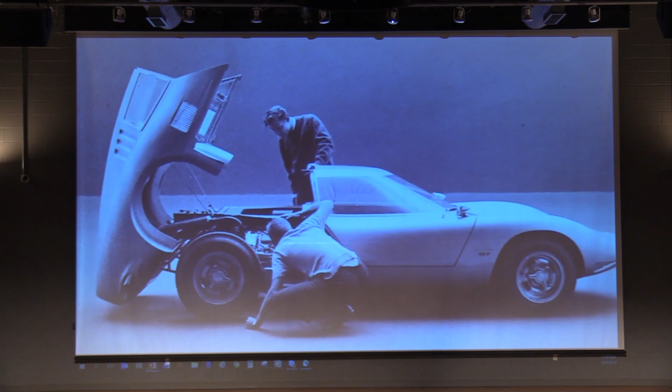I feel no matter how good the car looks, pretty as pretty does, she's got to go like she looks. I wouldn't have a car that didn't have the fastest engines and everything. I've got engines in here now I shouldn't talk to you about, because you're not supposed to be doing this.

The best in every individual. So to bring out the best in people, you have to have them involved. Well, people like to be involved in things that are exciting, and of course the whole idea of racing is exciting in itself, to be out here and enjoy the thrill of racing.

We're so close to bringing this dream of an all-new mid-engine Corvette to reality.

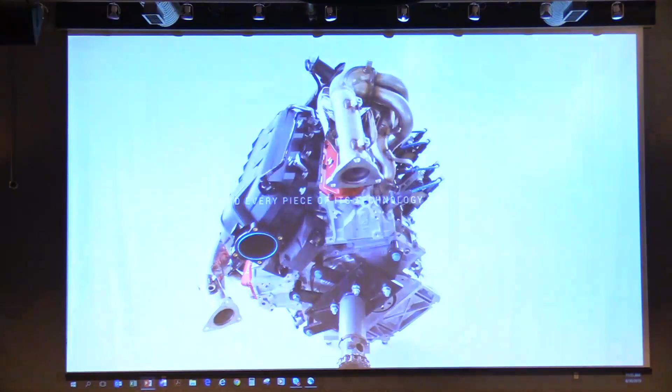World-class lubrication system. More tactile feedback, so more direct steering. The rear weight bias for better acceleration, performance, and track times. A dual-clutch transmission, quicker than a human being could shift a manual transmission. The history, people, mystique of the car, we're simply taking the baton across the finish line. And this is really highlighting that craft and quality. This is going to be the car for a new generation. A very compelling three-dimensional machine. A game changer. People will look at it and they just will not believe what they're seeing.

When you get into a Corvette, you're a superhero.

That's you guys. You guys are the superheroes, and thank you so much for being here. We wouldn't be able to do what we do if it wasn't for your support, buying the cars, being part of it, enjoying it, making it part of your lifestyle. So thank you very much.

It's really weird watching ourselves on the big screen here. I don't know about you guys, but it's pretty awkward watching ourselves back. Anyway,

That video was a compilation, it was not scripted. They just sat all of us on the team down and talked to us about the car, and I think it took 8 or 10 hours, so we got 2 minutes of good material. So that's what you saw. And actually we used a lot of that material.

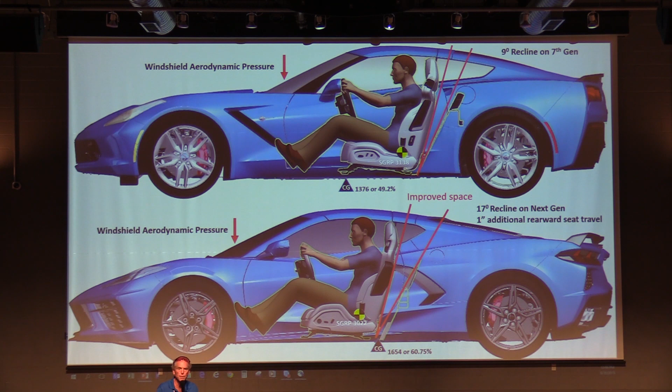When you put the windshield here, you don't need such big aerodynamic aids. So on our Z51 package, which actually has true full vehicle downforce, you see there's just a little tiny splitter on there. That really helps for contacting curbs and things. So that's a way that the architecture itself makes a fundamental change into the way we can do our engineering.

So the other part of it—does anybody here drink beer?

Okay, a couple people. So the luggage—you know, it was funny because when we did the reveal, I wanted to talk about luggage room, and the communications people were like, 'Are you nuts? Why would you talk about luggage room in a reveal of a high-performance sports car?' But we come to these events and we watch what you do with your cars, and we've kind of spoiled you since the 5th generation. Even though people don't say luggage room is a reason for purchase of a performance car like this, it's nice, isn't it, to have that kind of capacity.

And it lets you incorporate the car into your lifestyle. You can go on long trips. You don't have to bring an SUV. You can look good, you can have fun driving, and you can bring everything you want in your car. So we wanted to be able to keep doing that.

We had the issue of—it would have been easy to just do a fixed roof car. We wanted to keep the removable roof panel, even on the coupes, and so we had to have a place to put it. It had to fit in the back. That's why you have a trunk in the back and a trunk in the front. It made our job a lot harder, but that's part of the formula—we had to figure out how to do that.

And actually, if you fill the front and the back with water, it's almost exactly the same volume. The shapes are very different, and that was a compromise we had to make, but if you look at the total volume—if you're packing with soft luggage and so forth—in fact, even the luggage that we sell as an accessory that completely fills the back of a 7th generation car also fits perfectly in this car.

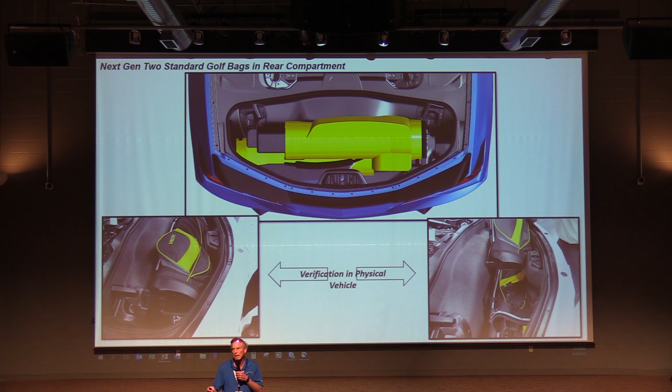So in the back, we want to make sure, and we say 2 sets of golf clubs, that'd be 2 day bags, but we actually did go out and get a pro bag, like a real professional golfer's bag. I don't have the picture in here, but you can put one of the giant Caddyshack type bags here in the back, and of course the front.

The top goes back here, and one of our development engineers likes to ride mountain bikes. He's got a 29er, if you know what that means, 29-inch diameter wheels, the biggest wheels you can get on a bicycle. That fits in the back, and then he puts the bike on the bike rack. So you'll find that this car has a lot of utility, certainly superior to any other mid-engine vehicle. There's the roof in the back.

I mentioned we have both exterior and interior design here, so it's awesome to have both Kirk and Brian. Kirk's going to go through some of the stuff he went through yesterday, talk a little more about exterior design, then we'll get Brian up here to talk interior. All right, good afternoon.

Yesterday we went through the exterior design, showed you a lot of stuff on aerodynamics, things like that, and we really look for the exterior, go back a slide, sorry, really look for the exterior to draw you in.

We're trying to get your attention with the exterior design, but it's really the interior design that we look to seal the deal. We spend a lot of focused attention, a lot of design effort goes into the interior. If I had to score between exterior and interior, as far as the number of releases, the number of components, the interior probably has 3 times the components that the exterior does.

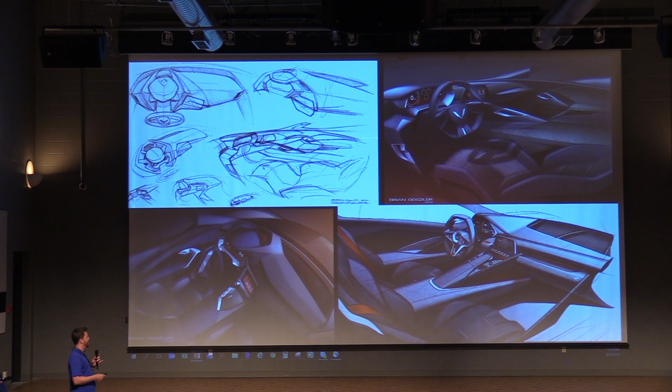So these are some of the early design sketches. We always start in 2D, some combination of digital drawing and pen and paper. We have a team of about 4 or 5 designers sketching different themes. You can see in some of the sketches everybody's excited that this is the first mid-engine Corvette, so we're bringing that into our sketches. We're looking at different ways we can tie in some of the design features from the engine compartment, bringing that through and forward into the interior.

Here you can see some of the first sketches from Tristan Murphy, the lead designer, and the very beginnings of the cockpit shape coming together. You can see how the forms in the engine bay are feeding in through the waterfall and up toward the center. The cockpit shape starts to take form here around the steering wheel and driver's area. This is basically the final theme sketch that Tristan did.

So what you can see here is the adrenaline red accents in the cockpit area, and the screen tilted toward the driver. We wanted to make a very driver-focused environment, but also still have a really nice space for the passenger to enjoy too.

After the sketches, we move forward into clay model, and it's really important for us as part of the design process to be able to see and quickly modify, model, and test out different design solutions. Clay is a really great tool for us to do that. We can change it very fast, and we can work back and forth.

We have a buck in the studio where we actually have physical seats from a C7, and we can cube it up together, push the seats in there, sit in it, see how it feels, and double check our assumptions on things, then pull the seats back and start working on it again. We can do that within half an hour.

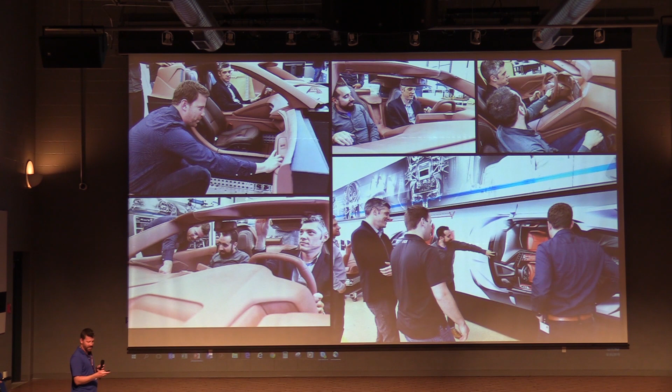After we go through the clay model, another big part of the project is creating hard models, so we actually create a wrap model. This is all foam parts painted in primer right now, and we wrap these parts in leather, and that way we can show senior leadership within the company and kind of sell the vision for what we want Corvette to be.

So here's a couple shots of that foam model. You can see the Stingray in the back there.

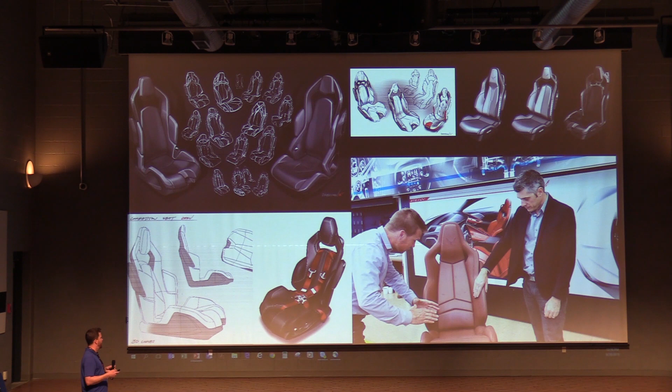Another huge part about the C8 interior is the new seats. We have a 3-seat strategy, Harlan's going to talk a little bit more about that. But Nathan Dressman, who is the seat designer, you can see him here. We wanted to have the base seat, which gets you your value, the GT2 seat, which gives you a lot more luxury, great for grand touring, and then also the competition seat, which builds on today's competition seat with these nice aggressive bolsters to hold you in place during hard cornering.

Another great improvement for the C8 is the steering wheel. We're very inspired by looking at race cars and things that were out in the gaming market, and we're looking at the digital screens. On the C8 we have a 12-inch digital cluster.

One of the things we found when we were sitting in the car with the round wheel is that it was clipping off the top corners of the instrument cluster. So we opened up those clusters and flattened the top. We flattened out the corners of the wheel to allow us better vision to the cluster, and then we also dropped the top, which allows a little bit better down vision that Tad was talking about a couple minutes ago.

And then bringing up the bottom also gives you much better access getting in and out of the car, so you're not banging your knees on the steering wheel.

So here you can see kind of the final production wheel with the Z mode button that Sang did. And then here's some more detailed shots on the car.

One of the things we really wanted to focus on with the interior for the C8 is really getting a huge level of quality and craftsmanship into every detail. So you can see the different layering going on with the cockpits, the various genuine materials building up: real leather, suede, perforated metal, and stitched leather. So everything that you touch when you sit in the C8 is going to be real wrapped goods, real aluminum, real carbon fiber.

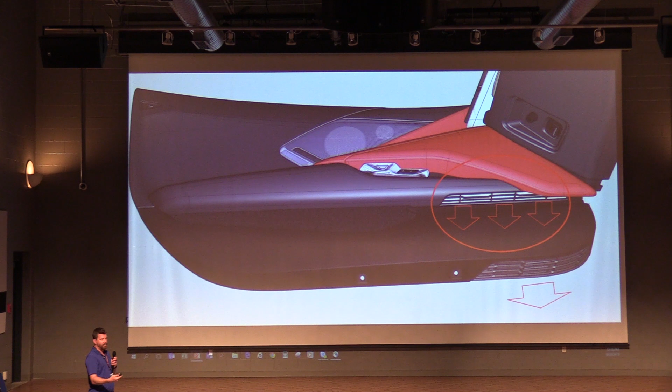Another innovation we had here was that Corvettes have always had a bass speaker in the door, but in the past what we've done is used a plastic speaker grill, which means you have a big piece of plastic beside your knee. We wanted to see how we could improve on that for the C8. So what we were able to do, working with our engineering team and the team at Bose, is port the sound out through the bottom of the door. So we have these vents on the front, and that allows us to get the bass sound that we need, but also have these nice soft wrapped parts right where your leg is. That's a huge improvement.

And then, speaking of the speakers, this is a nice shot of the stainless steel speaker grill that's on the waterfall, and you can see the cross flag logo in there. That's kind of a nice tie back to the way we've done the waterfall in the previous cars. And here's the same shot of the speaker grill in the door.

You can see the real carbon fiber, real aluminum on the console. It's just some nice craftsmanship shots showing the interior.

And here's just kind of this shot that just kind of sold everything for us, looking at the driver cockpit area and how exciting this thing's going to be to drive. We really want that feel of when you sit in this car, you're going to be excited. It's a really exotic environment.

And then here's just the whole team that worked on it. At the end of the day, designing a car, especially like a Corvette, is super fun, but it's all about the people, and these are the people that made it happen.

So just like on the exterior, we work hand in hand with the interior folks. It's such a highly integrated machine, everything has to go together. So all the things you're doing on the exterior have to work on the interior.

We really wanted, I was talking about the down vision, to engineer every millimeter of that out of the height of the cowl. So we knew we had the exterior, Kirk pushing the hood down as low as possible, but getting the interior to follow that was a really big challenge.

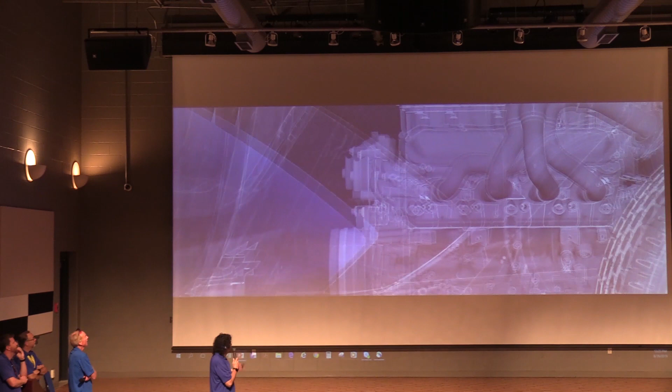Okay, so this is pretty cool. This is what you see in the 12-inch cluster when you get into your new 2020 Corvette. That was a cool way to welcome you to the new Corvette when you get inside. I'm going to talk a little about the functionality of the two screens we have in the Corvette.

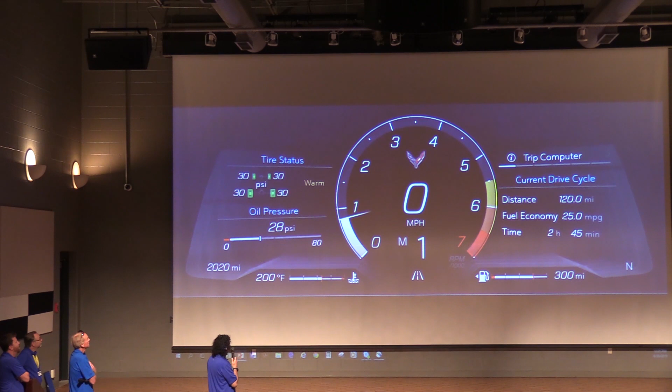So this is your 12-inch cluster, and you see as it goes through the different driver modes, Tour, Sport — for Sport it rotates the tach because you're going to be in the higher RPM bands. When you get to Track, we looked at what we use in the race cars — very purposeful, functional digital readouts, taking off of racing where you just want that information as fast as you can. Tour mode is more relaxed, straight tach, and you see how it cycles through here.

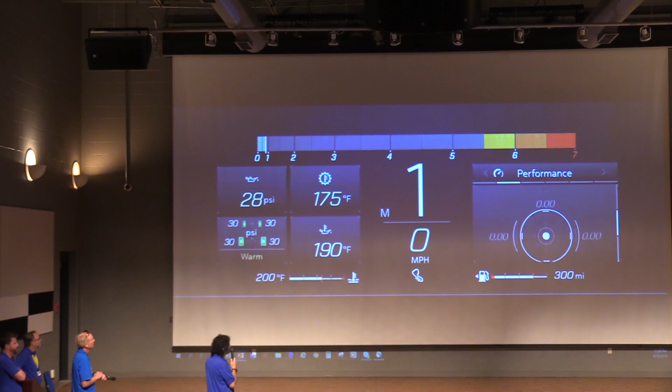You'll notice on the left side we have gauges, and on the right side you have our driver information center. On the left, we call those info tiles, and you can select them — there are actually 8 possibilities. In Tour and Sport mode, you can pick 2 gauges to put on the left side, whichever 2 you want, ranging from battery, ELSD, fuel economy, G-force, oil temperature, oil pressure, tire status (both pressure and temperature), and transmission fluid temperature. So you can pick the 2 gauges you want displayed all the time.

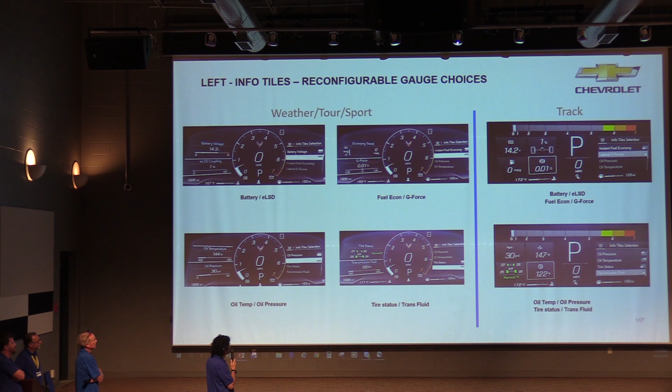In Track mode, we made that even more functional with 4 — you have the choice of 4 more compact gauges on the left side to pick from, so you can pick 4 of the 8. You can also vary it so that Tour, Sport, and Track each have different gauges selected.

If you don't want to touch it, we set it in the factory for you, what we thought you would like, but you're always welcome to customize and make it to what you like. If you're thinking this seems a little complicated to mess with, don't worry, we already set up the sport mode with the G meter and oil pressure, tailored for each of the modes. It'll remember which settings you customize too, based on each driving mode. So if you want to set up your Z mode or My mode with individual customizations, it'll remember that every time you go into that mode. It remembers it, so every time you start the car, it's where you left off.

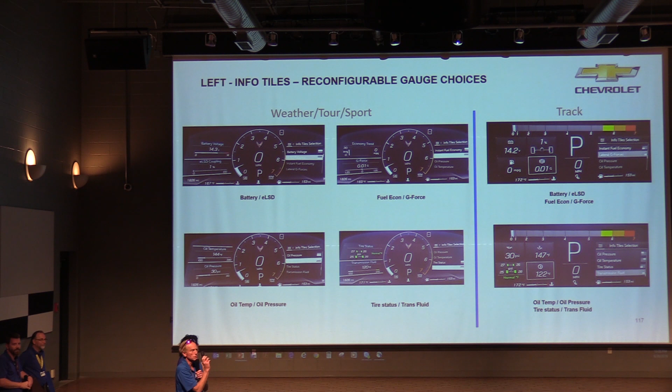Somebody may have a question about the small digital gauges. People might say, am I going to have to remember at what temperature I start to get into trouble? Because in an analog gauge you can kind of see how far it goes. The perimeter of it starts to glow different colors as you get close to a warning. So just out of the corner of your eye, if you're on the track, you not only get the digital reading, but you can start to see when you get to the yellow zone or the red zone. Really easy to spot once you get there.

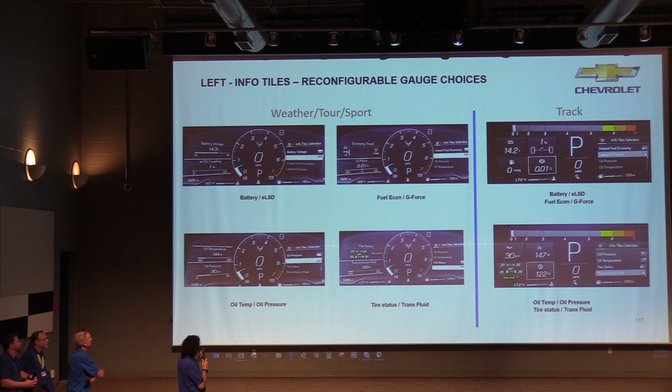On the right-hand side, I'm going to show you how that looks. You have different functions, different columns, controlled with the steering wheel control and thumb wheel. You have your trip computer information, fuel economy, trip timer. Then we have the performance category: 0 to 60, lap timer, and friction circle. We have an audio category, so you can easily access the audio. We have maintenance: oil and fluid life, air filter, engine life. And then we have our options where you can get in there and, if there's a certain cluster you want all the time, override that and do it. You can check your units, your tire pressure, things like that.

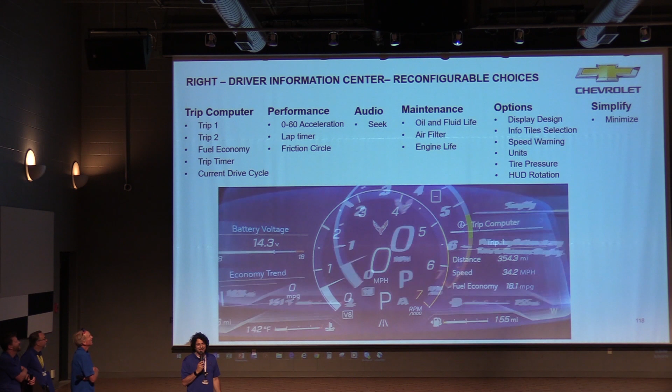And then finally, if you say this is really too complicated for me, I just want things to calm down, we have the minimize option. It's just too much, I just need to unwind. So there's a little tour of the new gauge cluster.

All right, there's another cool feature. I don't know if Harlow is planning on talking about it. You're going to talk about stealth mode? No.

So another cool feature, kind of like simplify, is when you're driving at night and sometimes you don't want to be distracted by a bunch of lights inside the car. If you turn the dimmer switch, which is on the left side, and just keep turning that, it'll get dimmer, dimmer, dimmer, and the very last click turns everything off except what's legally required. So it's just basically showing speed, and the whole interior is just dark. If all you need to know is speed, and it's a dark night and you want to concentrate on seeing out the windshield, that's like a stealth mode.

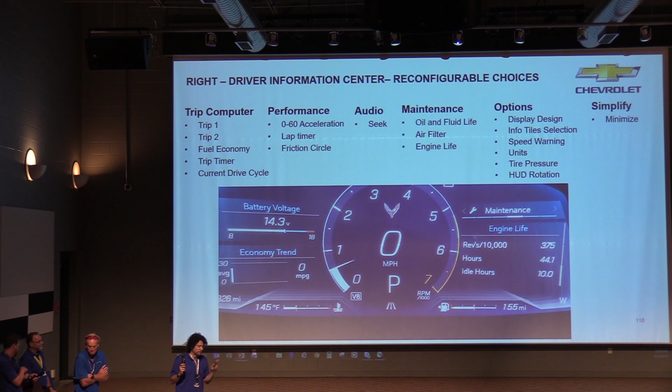One of the things we really tried to do going from the 7th gen to the 8th gen was make it so there was less interaction needed to get the information you wanted, so you didn't have to cycle through as many pages. In the right-hand corner, you have your fuel and your range always displayed, which is always nice to have. We have the temperature on the left side, always displayed, so we kept that there all the time. And we even also have the gauge for V8 or V4, so you can see if the active fuel management is going.

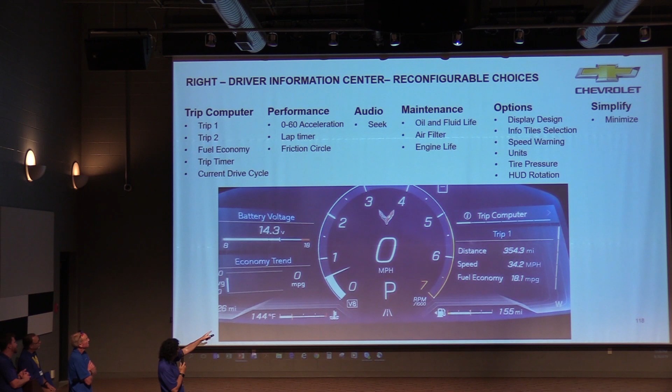In the upper right, you see this little rectangle with three dashes. Normally when you're on the road, that'll show you your speed limit sign. Some of you may look at that, and some of you probably don't care, but it's there for your service.

In the head-up display, we also have Tour, Sport, and Track modes, and you can customize these to pick whichever one you want to use in the different modes. Head-up display is included in 2LT and 3LT. One of the neat things about it is on Track mode, we made that really simple, with a large gear indicator and shift lights at the top, very racing oriented. If you have your performance data recorder hooked up, it'll give you your lap times as you go, and plus or minus, if you're out on the track. In Sport mode, the center gives you the round tach and the G meter as well. And we brought turn signals back to the HUD. A lot of people, well, I know you know who you are, have been asking for that.

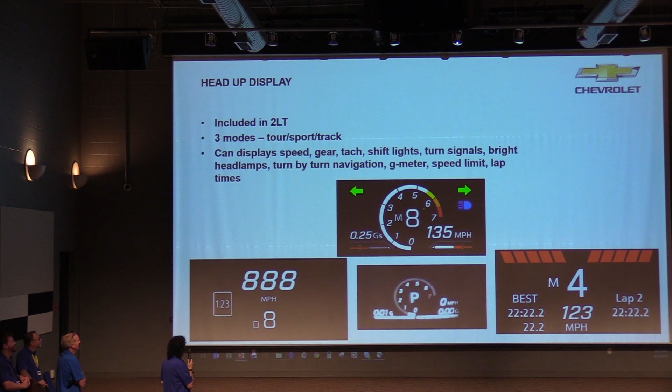Our center screen is the Chevrolet infotainment system, used across a lot of Chevrolet cars and trucks. It's a very simple, easy to use system.

We also have standard Apple CarPlay and Android Auto, no subscription required, like some people we won't mention, BMW. You just get it and use it as much as you like.